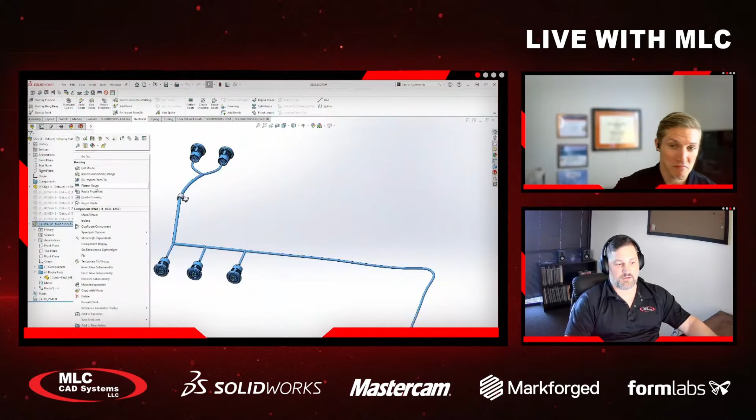Now, what I want to do is I want to flatten this, because if we route a harness, that's not the end of the line. We really need to manufacture it. And so to manufacture it, we need to flatten. So I'm going to right click on this and we're going to choose to flatten this route. Now, when I flatten the route, it just shows me the route itself, and I get to choose two different ways to flatten this route.

There's annotation or manufacturer. Now, have you ever heard of a nail board drawing? Yeah, I think I have. With all the lines of just string. Yeah, essentially. So what you can do is, on a plotter, print out one to one exactly what this harness is going to be looking like, its true shape, and that would be the manufacturer view. And then you get to specify the size of the form board, and you can lay this harness out exactly as it would be in real life. Okay.

Then there's also annotation, so that would be the manufacturer view. The annotation would take like a 10-foot section of harness and put it down and then give it a little leader and say, this is going to be 10 foot. Whereas manufacturer is going to be, well, it's going to be 10 foot. Yeah. Okay.

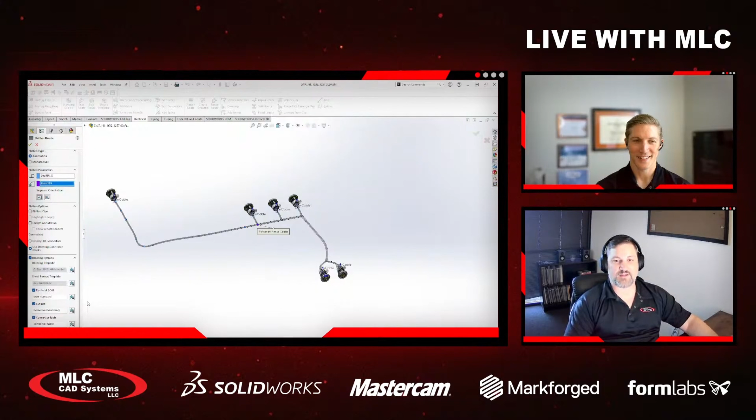Now we're going to do the annotation so it's just a little cleaner. And then I'm going to choose this flattened section. So which section are we going to flatten around? That's going to be this one. And then I'm going to specify the point that's the center of the route, which is going to be about right there. And so that's going to align my route whenever it flattens. That makes sense. You have to do something around. I mean, sheet metal flattening works like that, surface flattening, so you kind of have to choose. And I guess that's why you chose something in the middle, because it would be more effort or skew or whatever if you start at one end.

Correct. So I also want to make a drawing. So I'm going to turn on my drawing template here. And then I've got BOMs and wire balloons and all kinds of stuff that's going to show up. Now, when we go over to this drawing, it's going to look messy. It's going to take a little bit of cleanup, but it's way easier than manually typing all this information.

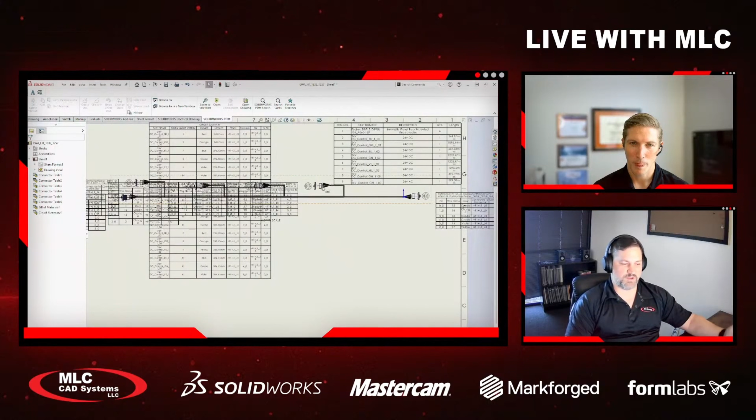Yeah, I'm sure. That's the nature of 2D drawings, man. Even if I'm like, insert model items on a regular mechanical drawing, it's going to take a little cleanup, but man, it's faster. It's way faster. And nowadays, we have the AI automatically make drawings. It's kind of the same deal. It gets you like 80% of the way there really fast. Exactly. That's exactly what happened here.

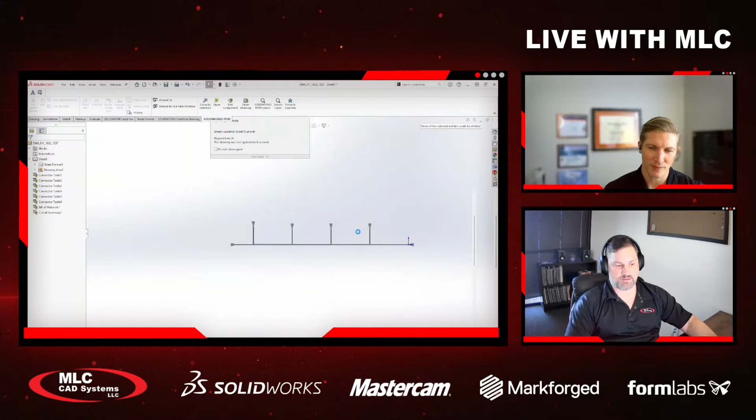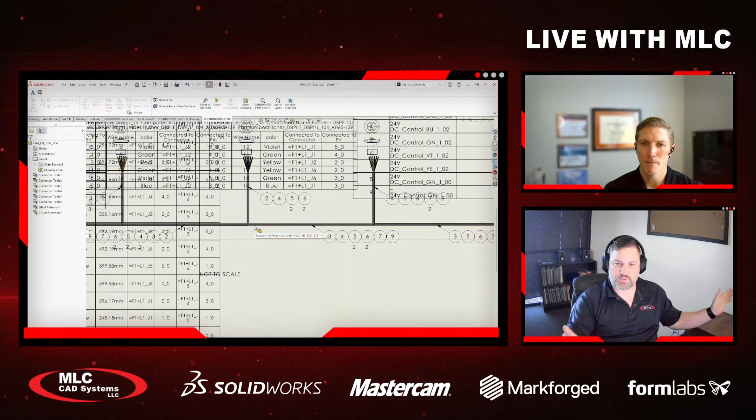Now, notice that this route has turns, and before we even clean up any of these tables, just from the routing perspective, they're turning. Well, let's go open this assembly and I want to edit this flattened route and I want to change this. So I can say, hey, I want these sections to be vertical so that it's a little bit straighter. Oh, that's cool. Pretty fast. Now that I've modified this route, I can just jump back over to my drawing and you'll see that this drawing has now updated. Yeah, does it need a callout where it's going to have the turn?

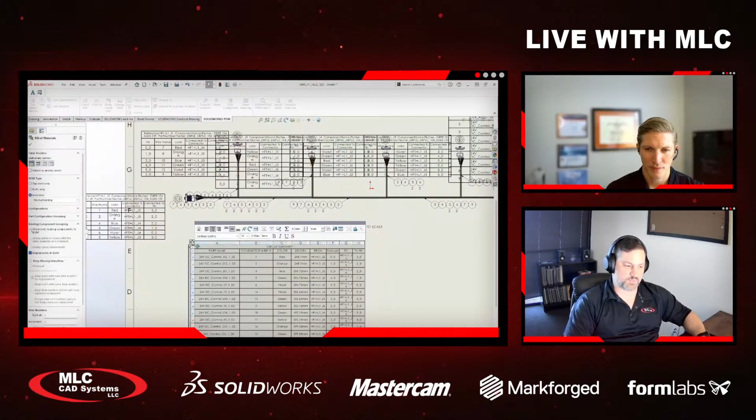Only if you need to. So that would be something similar to this, where the harness is splitting. Right. Versus just kind of bending, routing around something. Okay. Yeah.

Yeah. Now, let's take a look at this table, and I want to expand this table to where it's going to be a little bit cleaner. Obviously, we can edit this table or have a different table template or whatever you want, but let's just see if we can't get it a little bit cleaner here.

Yeah, circuit summary. This is using a bill of materials template table. Yeah, that it is. And some of it just went to multiple lines. So I'm going to try to get all this into one line and then just kind of squish it down. Okay. So it looks a lot cleaner already. So we put this circuit summary down here in the bottom.

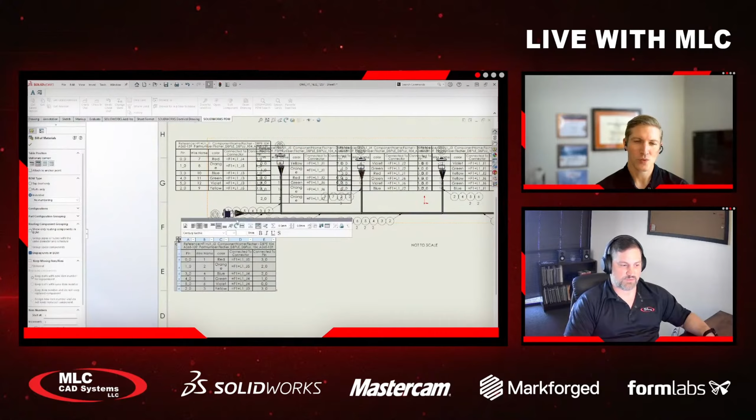This is your wire, and it says the length, and then it's from, and pin from, and then to, and pin to. So this is your from-to information. And then we have tables up here and we have balloons. These tables are attached to each one of these connectors.

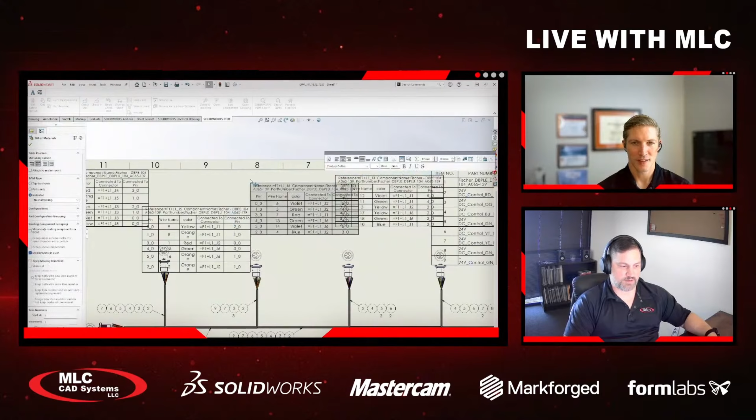And so you can, again, make these tables a lot smaller or move them around as needed. So you get a table for each connector to give you the pinouts of each one. Correct. Okay. And then just make some more room. And each one of these balloons is calling out length segments. So it's telling you which wires are in that specific segment of the harness.

And then obviously some cleanup up here, moving these tables around as you might need. I won't spend too much time moving tables, but there's another big table that you can put wherever you want on this drawing. I'll just kind of scoot it down. And it just tells you essentially a bill of material and what's going on with each one of these components. Okay. That's the BOM of the connectors.

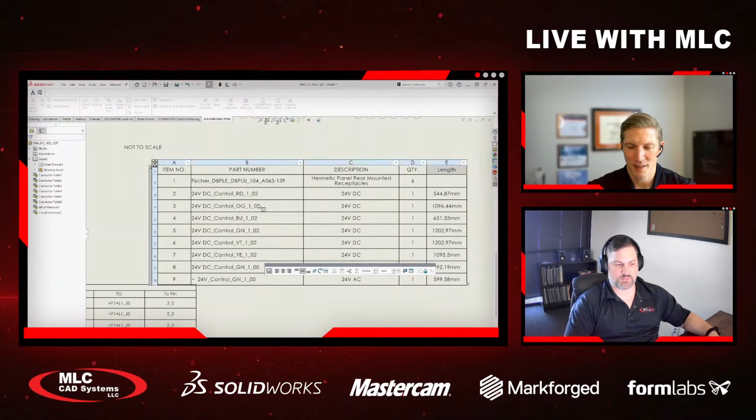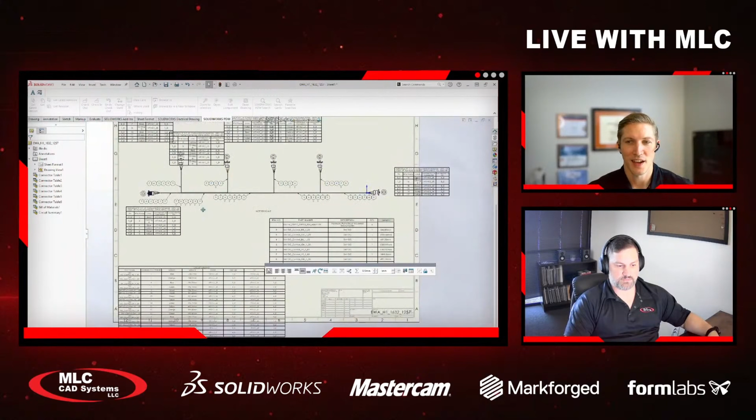You've got like a BOM of the... Correct. In the bottom left, it's the wires that are inside the cables. Yeah, so these are the actual wires, and you can see these are the wire numbers with all the colors and the from-to information. Uh-huh. And over here, this is the BOM that lists each one of these components. So you see that there's six of this connector, and then it lists each one of the wires and their overall length, or each style and its overall length.

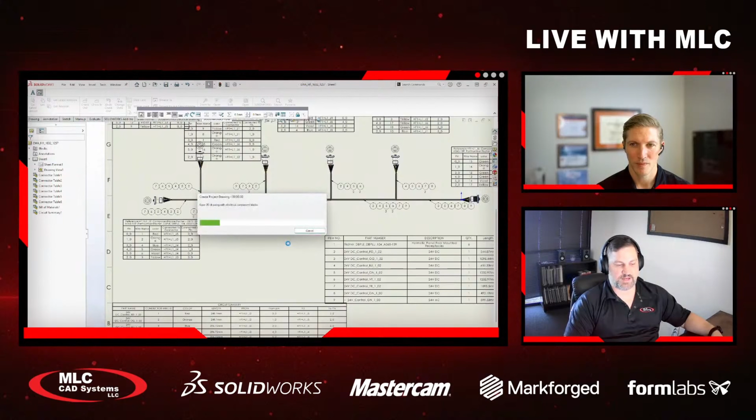Oh, I got it. Okay, that makes sense. And then each connector has its pinout table. So that's everything you need. Correct. Now, obviously, a little bit of cleanup, moving things around, but yeah, you're right. If you were to do an insert annotations, it could be much more gnarly than this. Yeah, for sure. It can get pretty nasty.

But clean this up all you want, and then all you have to do is hit this button right here that says Create Project Drawing. When you click on that, it prompts you to save it. I'll go ahead and save it, and it's going to push it back into your electrical project. And then you see that there's a new harness drawing called H1. Oh, really? Yeah, just kind of closing the loop here.

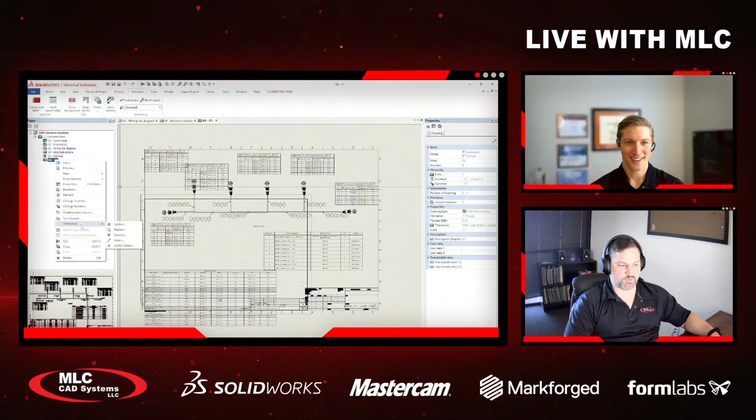Yeah, so there's a drawing made here on the mechanical side that you push into the electrical book. Absolutely. Could you do that with any drawing? Now, it might be any drawing that is tied to a harness inside of electrical. Okay.

Now, I have two title blocks here, so I'm just going to go to title block and I'll remove my electrical title block so that I see my mechanical title block. Yeah, right on. It would be better if you had the same title block. But now this drawing has been pushed back into SOLIDWORKS Electrical, and it understands where each one of these components are, and this is now a manufacturable harness drawing that has been pushed into your electrical project. Dude, that's incredible.